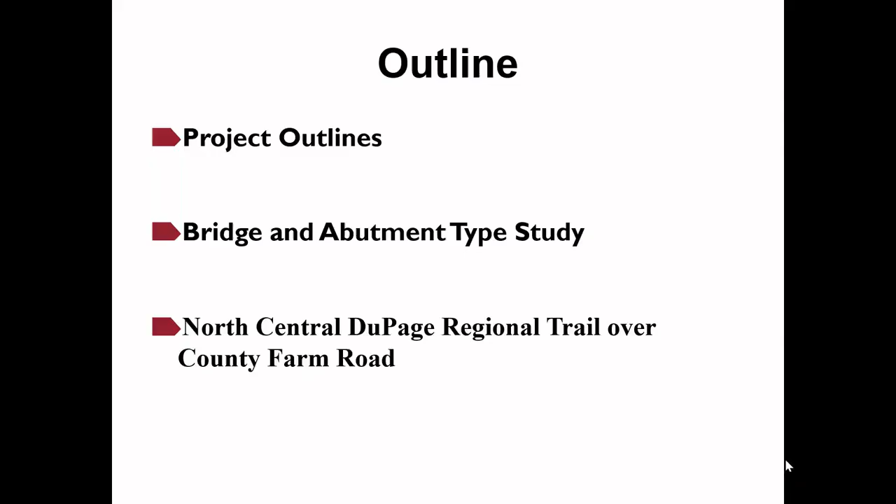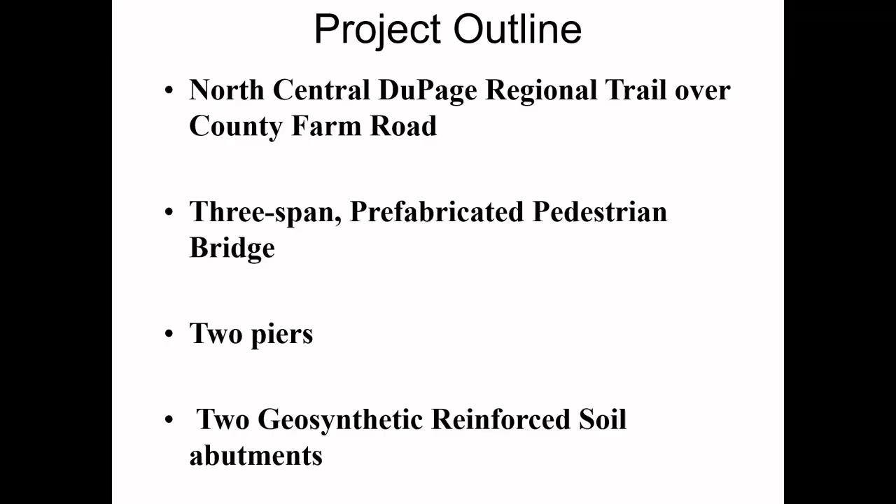Here's the project outline: the North Central DuPage Regional Trail over County Farm Road. It's a 3-span prefabricated pedestrian bridge, with 2 piers and 2 geosynthetic reinforced soil abutments.

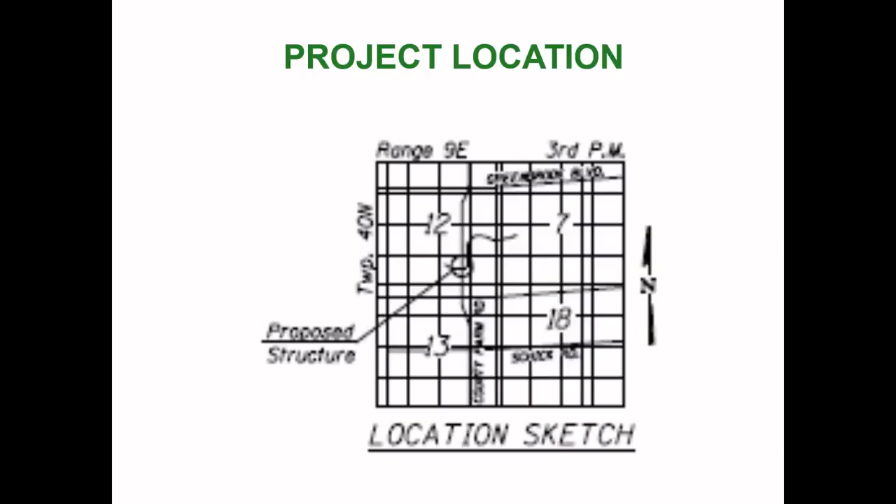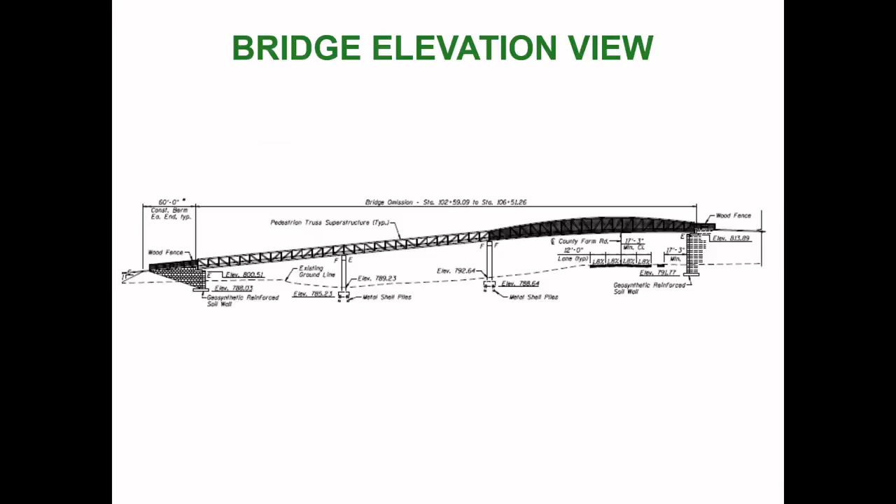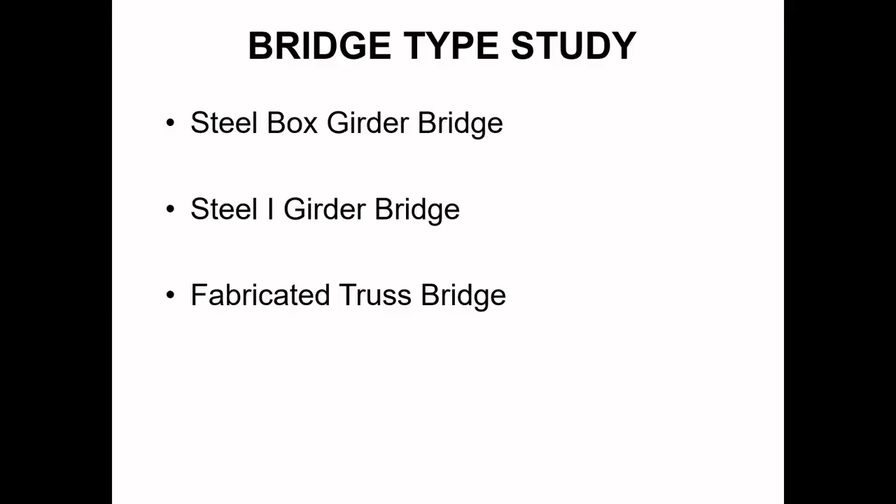During the bridge type study, we investigated 3 options. The first is a steel box girder bridge. The second is a steel I girder bridge. The last is a fabricated truss bridge.

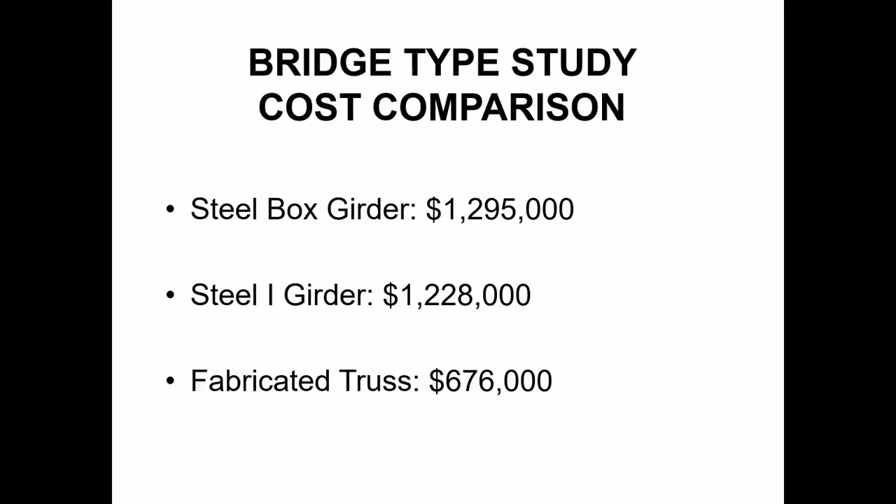Now I'm going to talk about the bridge abutment type study. We considered 4 abutment types during the study: the integral abutment with a wraparound MSE wall, the full height cast-in-place concrete abutment, the abutment with slope wall, and the geosynthetic reinforced soil abutment.

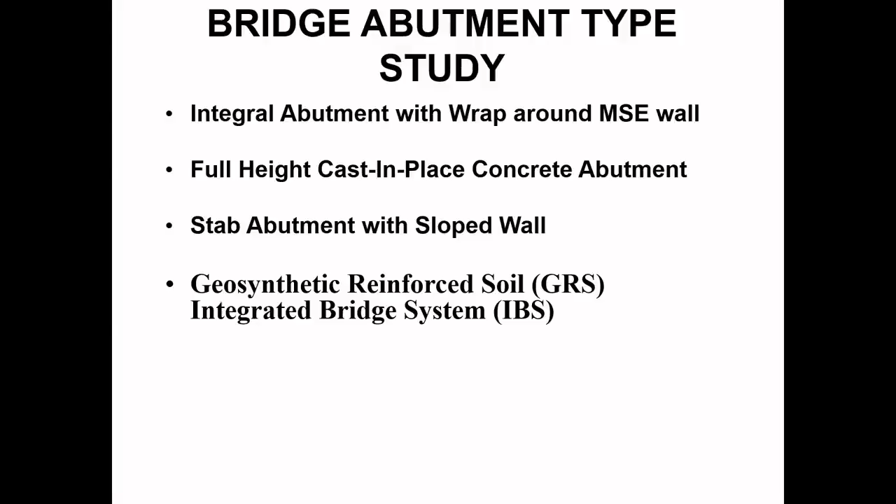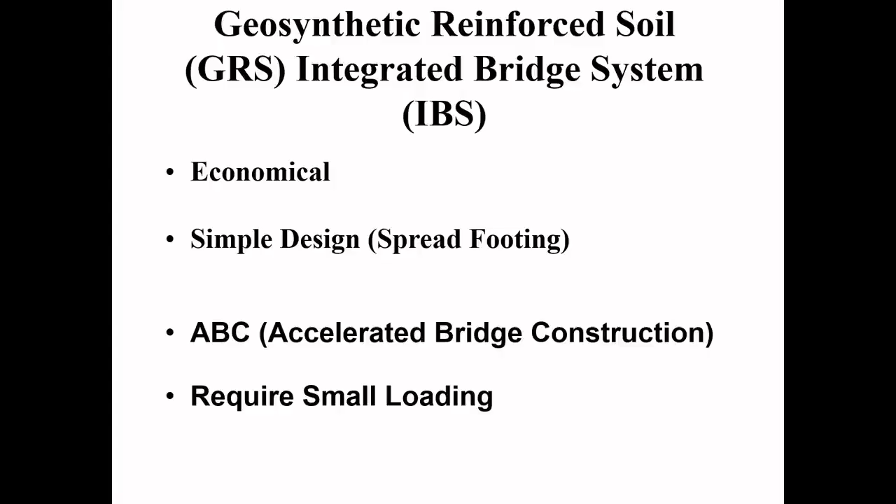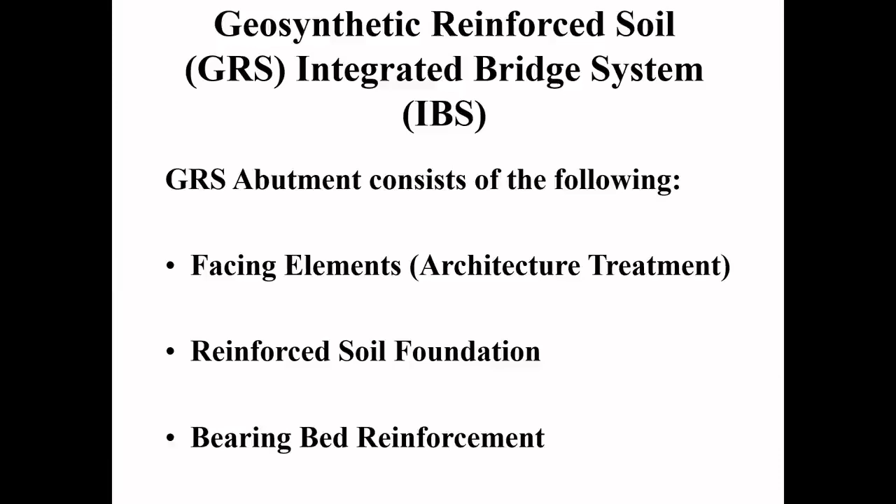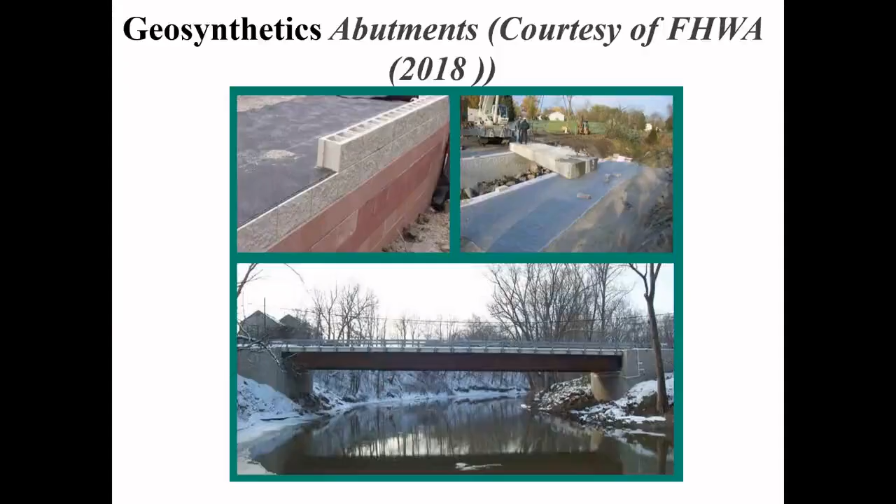The geosynthetic abutment consists of the following elements: the facing elements, the reinforced soil foundation, and the bearing bed reinforcement. Here are some pictures of geosynthetic abutments based on FHWA guidance. You can see the elevation view of the abutments, and here's the cross section showing the facing elements, the bearing bed reinforcement, and the reinforced soil foundation.

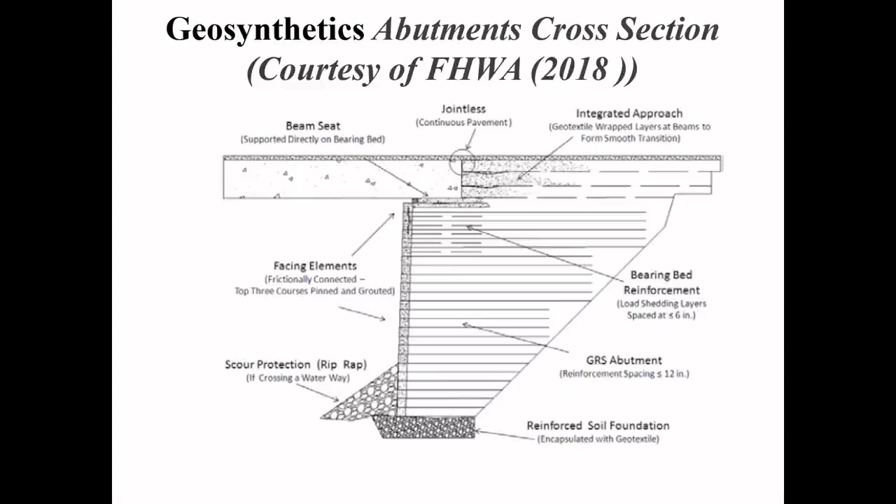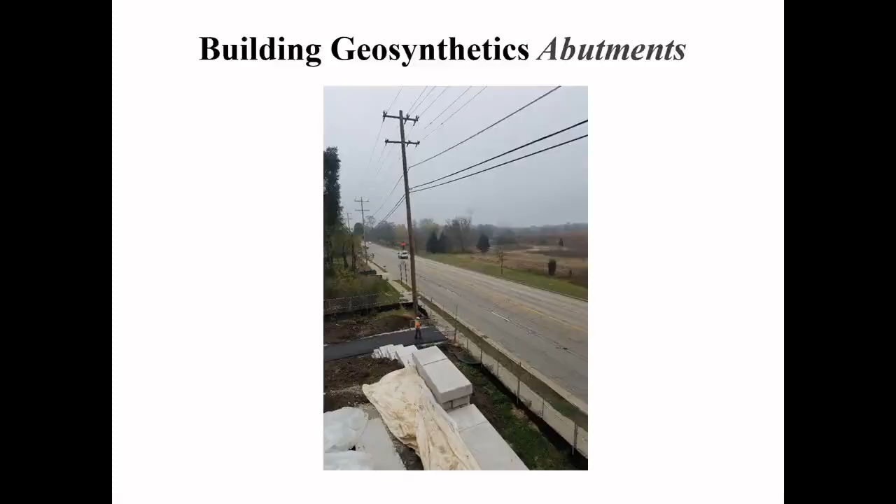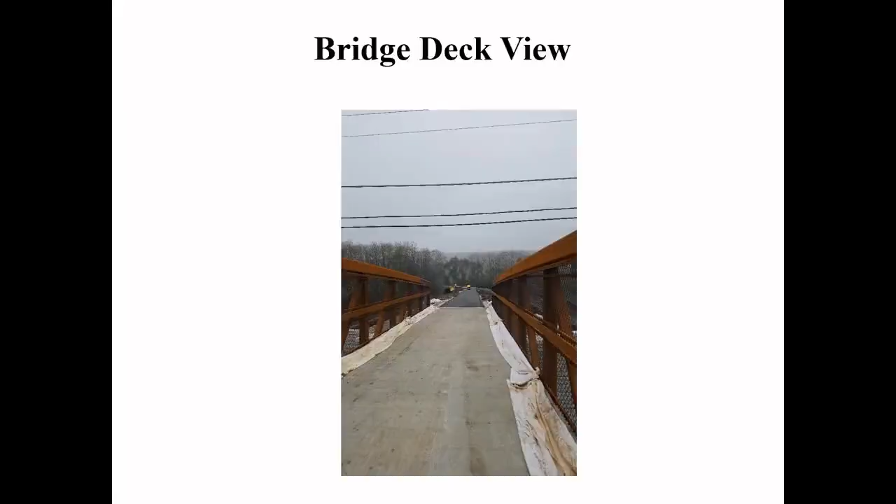Any questions? Thank you, that's the end of my presentation.

In this presentation, we are looking at a recent study we carried out on two large-scale GRS bridge abutment models. The main objective was to examine to what extent using large solid concrete blocks available from local suppliers could improve the load-bearing performance of these abutment systems, relative to a control model using the more common and much smaller CMU blocks.

This study was part of Dr. Ridwan Dagher's PhD research program, and it was carried out with the help and participation of several other research assistants at the University of Oklahoma, who are listed later in this presentation.

We know that in contrast to MSE walls, GRS bridge abutments are considered composite reinforced soil structures due to the confinement effect that tightly spaced reinforcement layers provide within the structure. Therefore, the structural contribution of the facing is conservatively ignored in the design of these systems.

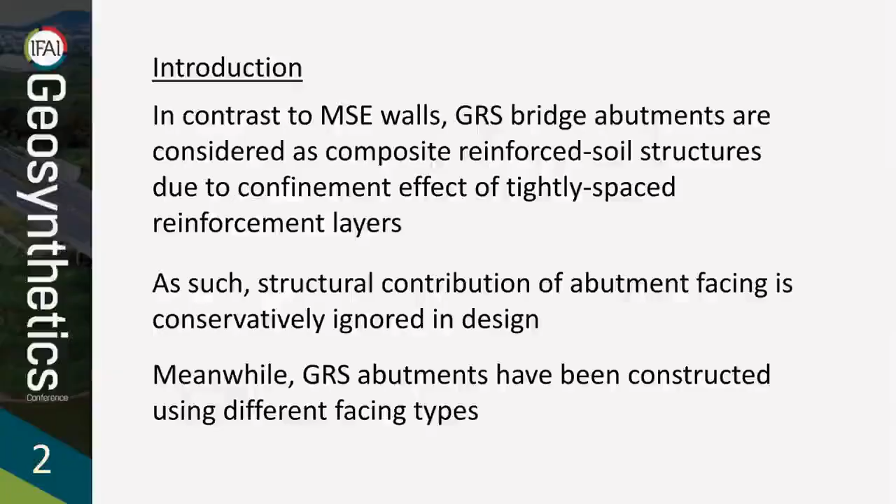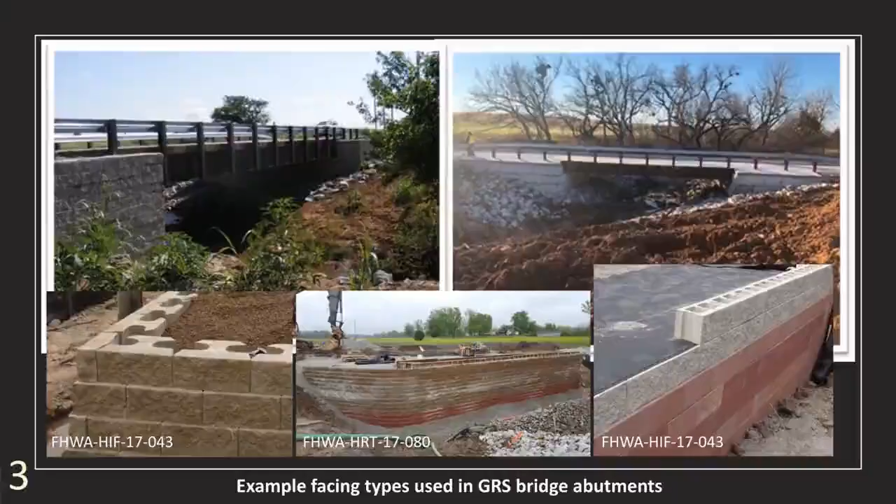Here we see example facing types that have been used in GRS bridge abutments. The one on the top right is the first GRS abutment bridge in Oklahoma, built using large solid concrete blocks.

So in this study, we wanted to examine and quantify possible structural contributions of larger facing blocks in the load-bearing performance of GRS abutments. The idea was to see if we could obtain reliable and convincing improvement in their load-bearing performance relative to those in the current FHWA guidelines.

In the long term, additional results similar to those presented here could help us possibly increase the allowable service loads and perhaps reinforcement spacing to some extent, for instance up to 18 inches, in abutments built with large concrete block facing, to help build them faster and more cost-effectively.

Apart from a direct structural contribution, there are other important advantages in using large concrete blocks for the GRS abutment facing. Number one, they can provide a firm formwork during construction of the GRS fill, allowing for a much better compaction process and increased fill density in the area immediately behind the facing.

Better compaction in this very important zone within the GRS fill is itself expected to improve the load-bearing performance of the abutment. Number two, not having to readjust small blocks during compaction, and the fact that far fewer blocks are needed overall to build the entire facing.

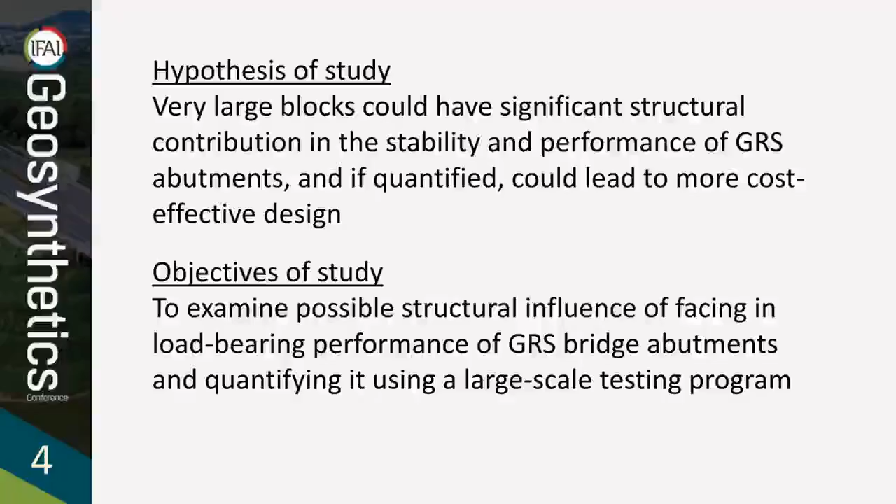Using commonly available construction equipment, these larger blocks can potentially help build these abutments faster than the more common CMU facing. This should further the core purpose of this technology as part of the ABC and EDC initiatives, which has been to build faster and less expensively since their inception.

Here are side-by-side elevation views of the two abutment models we constructed and tested in our lab. They were nearly 100 inches, or about 2.5 meters, tall.

The facing of the control model on the left was built with standard 200 by 200 by 400 millimeter core concrete masonry units, i.e. CMU, whereas the one on the right included significantly larger solid concrete blocks from a local supplier. The dimensions of the full-size blocks in that model were 0.6 by 0.6 by 1.2 meters.

Half blocks were used in the side sections.

The photographs shown here were taken after the models had been fully constructed and the loading assembly was set up for the loading stage of the experiments.

The blue load cells at the top have 400 kips of load-measuring capacity each, placed on top of a steel loading beam sitting directly on top of the GRS fill. We can also see wireline extensometers used to measure facing deformations and settlements of the loading beam.

Even though GRS abutments are invariably three-dimensional structures, we took provisions to reduce sidewall effects and directed our focus to comparing the performance of the two models within their 4-foot wide middle section in our tests.

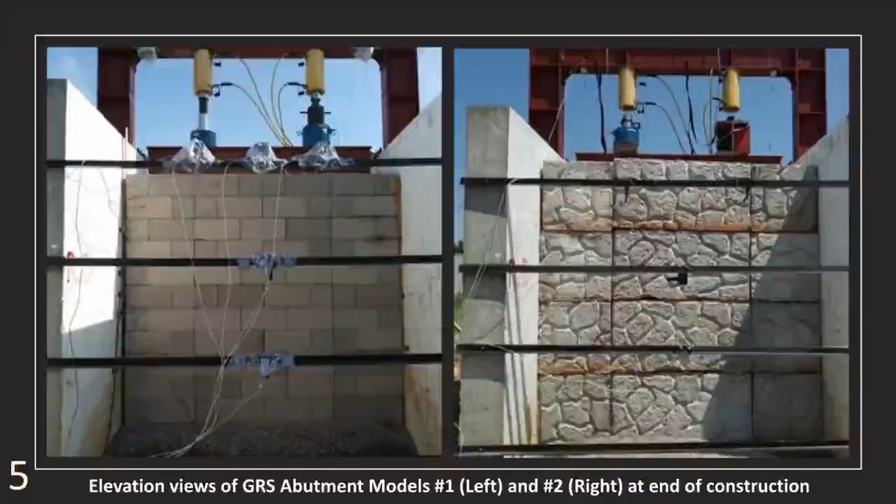Additionally, the instrumentation for the most part was concentrated in this middle section, and all reinforcement layers over the height of the models were placed separately in the three full-height sections we see in these abutment models, i.e. the 4-foot wide section in the middle, flanked by two 2-foot wide sections on both sides.

Here, the diagram on the left shows locations of drilled holes in the back wall of the test box that were used to run the wireline extensometers through.

And on the right, we see wireline extensometers that were mounted on the back of the test box and were covered with a tarp.

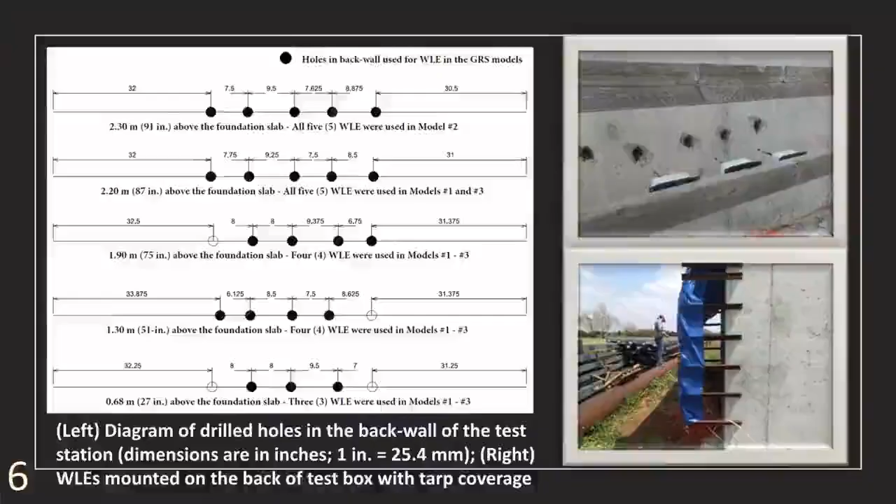Here are drawings showing the wireline extensometer layout in each model. The small circles represent the contact points of the wireline extensometers with the reinforcement layers.

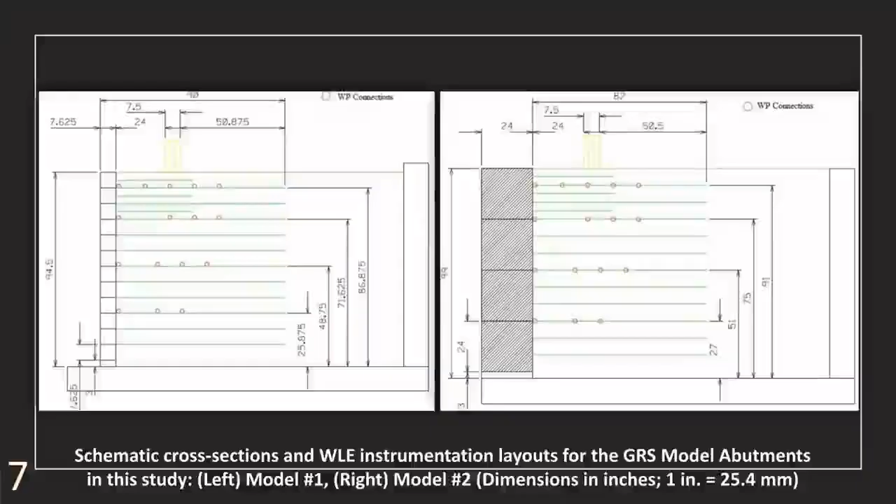An open graded aggregate called 3/8 of an inch cover number 2 was used that we obtained from a local supplier. Its gradation was comparable to, and in fact somewhat more open than the AASHTO number 89 aggregate, which is recommended and used in these abutment systems.

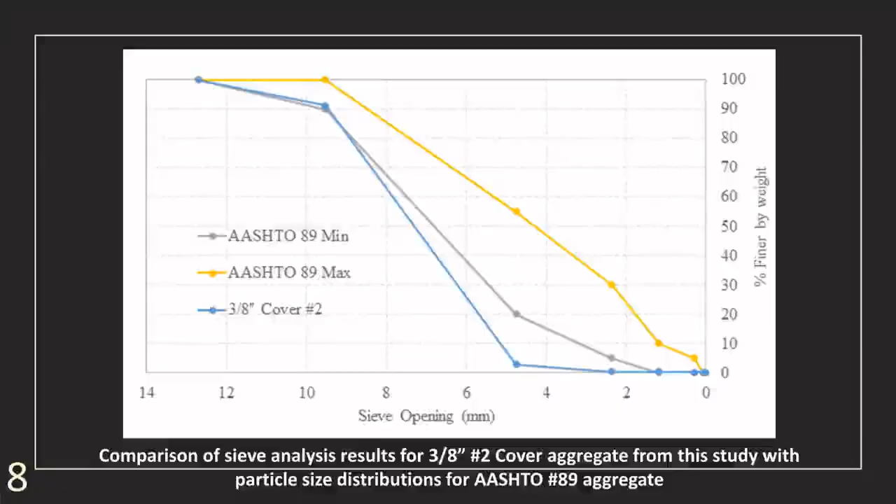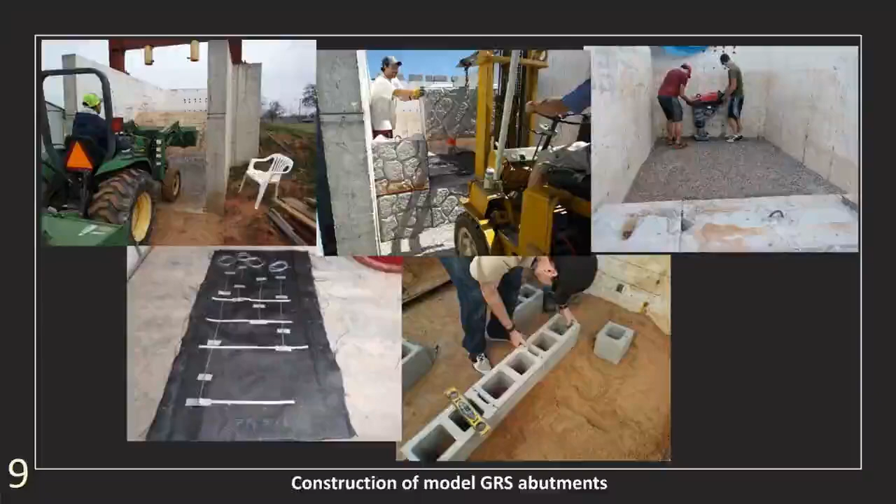Here are some snapshots of the construction procedure, including reinforcement instrumentation, placing and compacting of the fill, and the facing blocks. Here we see top views of model number 1 toward the end of construction. On the left, we see shorter reinforcement at 4-inch vertical spacing to make a bearing bed in the top section of the abutment under the loading beam.

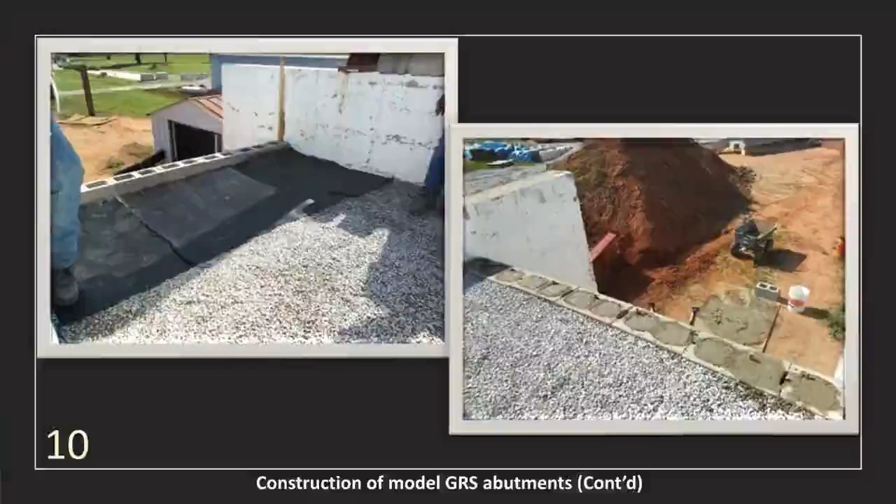And on the right, rebars and infilling of the top 3 courses of CMU blocks for added stability in that section of the facing as recommended in the FHWA guidelines. The load was applied in steps of 10 to 15 kips at a time, followed by a waiting period to make sure that the short-term deformations were stabilized.

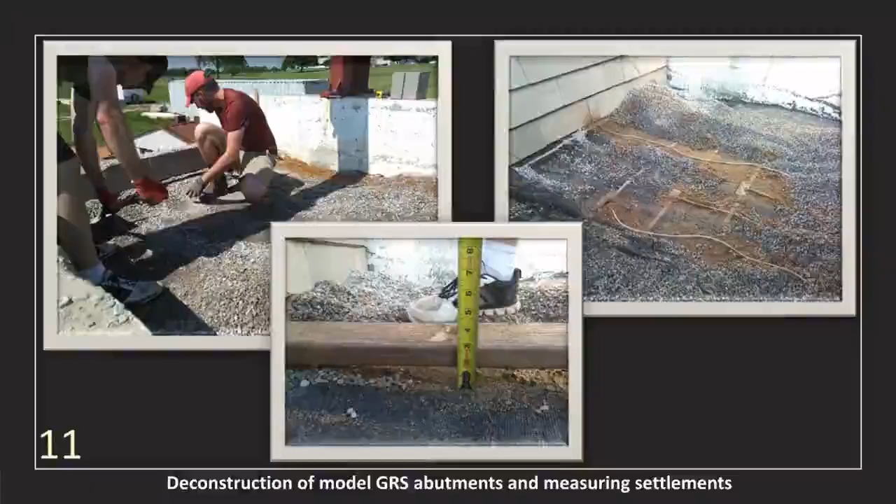We then proceeded to increase the load again in a similar pattern until we saw significant settlement under the loading beam. Afterwards, the load was also removed in steps until the models were unloaded completely. After that, the loading assembly was dismantled carefully, and we proceeded with the deconstruction of the models in layers, during which we measured GRS fill settlements at reinforcement levels.

Now, as for some results, here we see facing deformations at end of construction for each model. The contour map on the left is for the model with CMU facing, and the one on the right for the model with large concrete blocks, which shows significantly less deformation at end of construction, i.e. a maximum of 0.6 inches versus 2 inches in the case of CMU model.

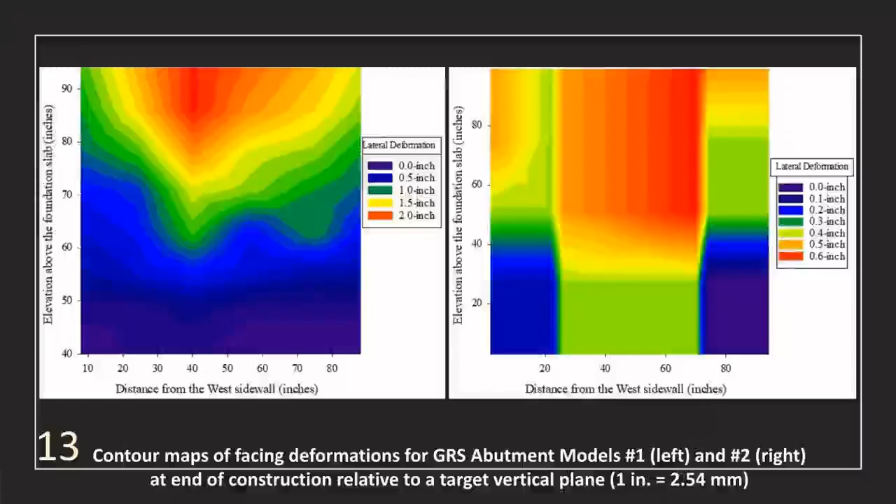Movements measured by the wireline extensometers that were attached to the tail end half of the reinforcement are attributed to the overall settlement of the fill and correspondingly the reinforcement layer at this location. But those wirelines number 1 and 2 that are significantly larger are attributed to both the settlement and outward movement of the GRS fill immediately behind the facing.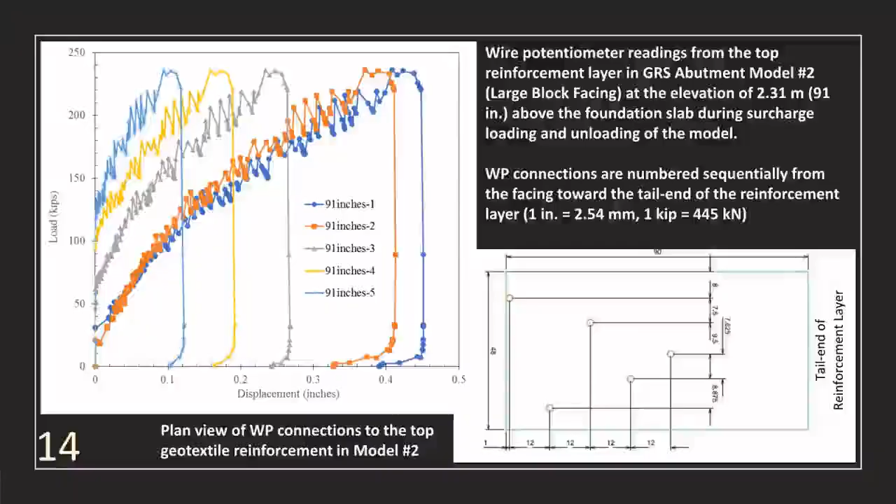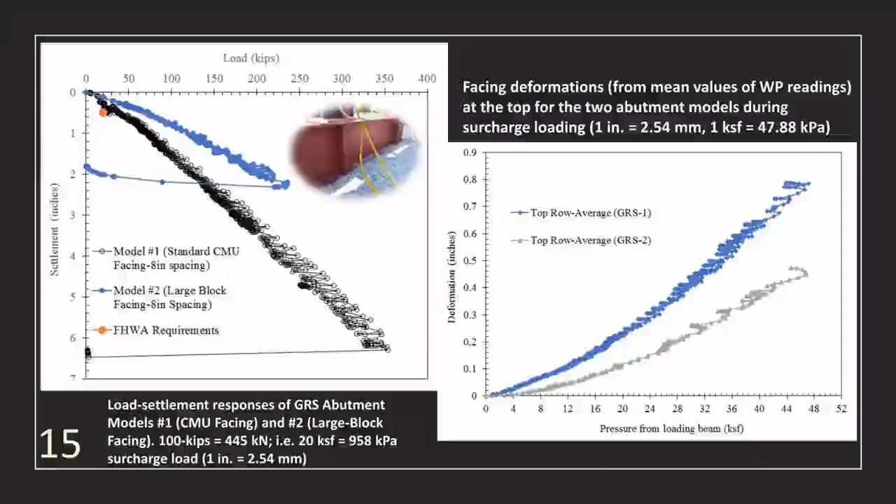The graph on the right shows a comparison of facing deformations in the 2 models as a function of the applied load. And again, we see that both models deform much less than the allowable limit of 1% height, which is roughly equal to 1 inch, even at much higher loading magnitudes than the design load of 4 KSF. Nevertheless, again, model number 2 showed significantly less facing deformation throughout the test.

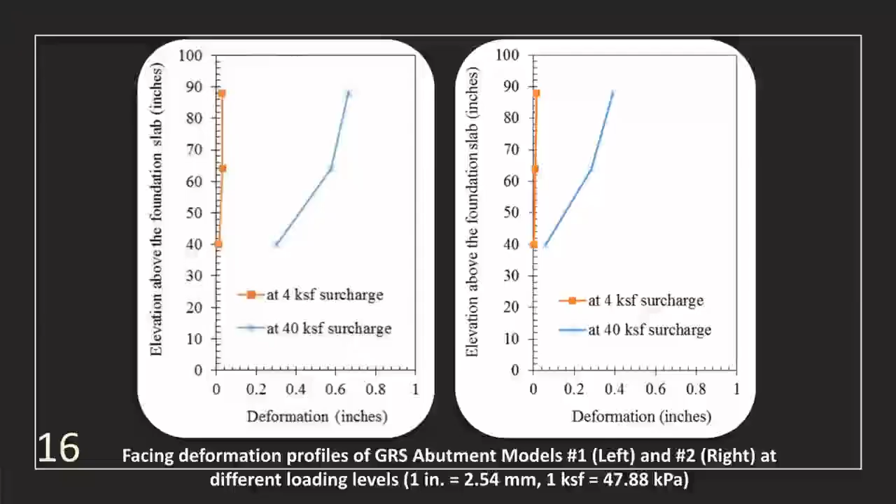This slide shows another perspective on the facing deformations that we measured for those two models. Results are shown for the FHWA design load of 4 KSF and a much larger, i.e. by 1 order of magnitude, load of 40 KSF for comparison purposes. Again, the allowable limit for lateral deformation is 1% H, which is about 1 inch, which would be the right-hand side boundary of each graph.

And here are some main conclusions. 2 large-scale instrumented model GRS bridge abutments were built and load tested to observe and measure differences in their load-bearing performances. Models were nearly 100 inches or 2.5 meters tall. The models were comparable to each other except for the facing blocks used. The size and type of concrete blocks used were significantly different.

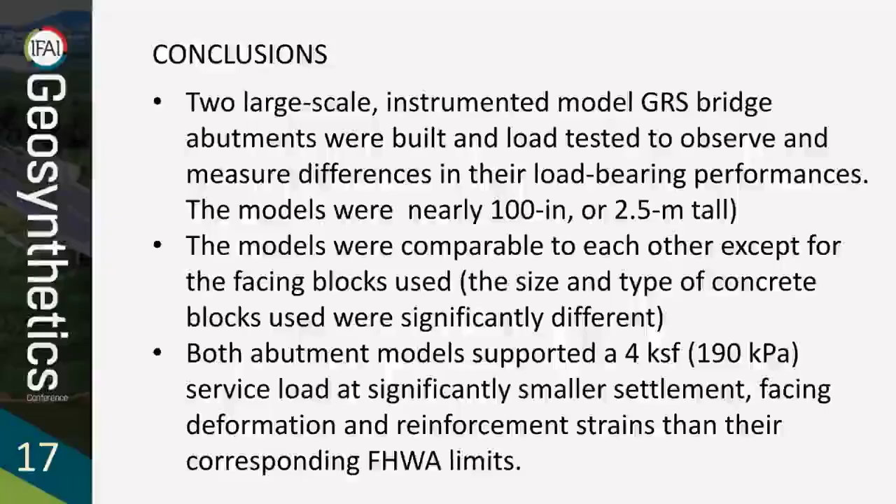Both abutment models supported a 4 KSF, equivalent to 190 kPa, service load at significantly smaller settlement, facing deformation, and reinforcement strains than their corresponding FHWA limits. Model number 2, with much larger solid facing blocks, showed superior performance to the model with the more common CMU facing alternative. It showed small deformations at any load level. While not included in this paper, large block construction alternative was also found to be faster and allowed for better compaction of the fill behind the facing.

So overall, results presented in this paper and findings in an ongoing follow-up study suggest that large block GRS abutments could lead to improvements in the load-bearing capacity and performance of GRS abutments, with a potential for a more widespread use in local and county roadway projects.

Hello, I'm Jennifer Nix with the Federal Highway Administration. We've been performing a lot of instrumentation and monitoring projects on geosynthetic reinforced soil integrated bridge systems around the country. This paper focuses on a GRS IBS in Sheffield, Massachusetts. It's a 105-foot long span at 30 degrees skew on 2 GRS abutments with the GRS integrated approach.

We wanted to look at the thermal interaction between the superstructure and substructure of this type of bridge system as compared to conventional integral abutment bridges. My co-authors on this paper are Michael Adams with the Federal Highway Administration and Mohammed Khan with HP Tech.

Hello, my name is Michael Adams, one of the co-authors of this paper. We've elected not to present each individual slide, but to simply provide an overview of the outline. First, the GRS IBS. Most of us know what that is. The fundamentals of superstructure-substructure interaction due to thermal effect on small bridges. The general difference between an integral and semi-integral abutment. An overview of the Sheffield Bridge specific to its geometry, materials, and sequence of construction.

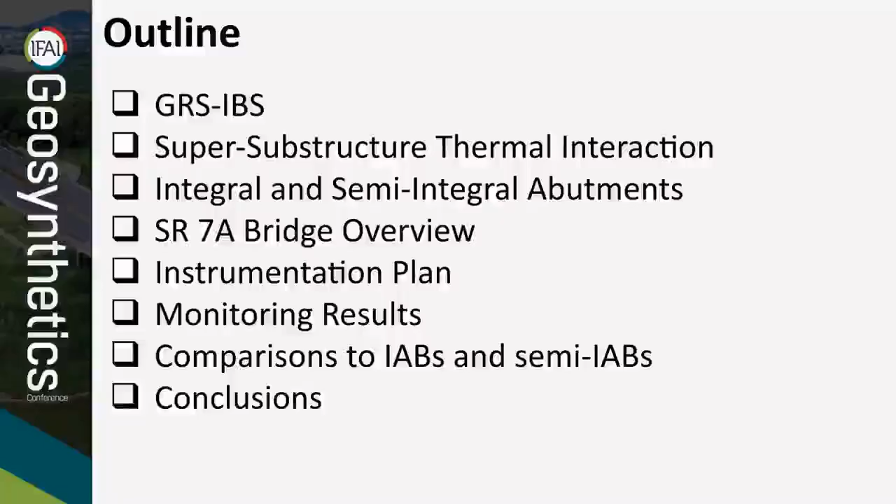The instrumentation plan specific to this paper are the contact pressure cells, the in-place inclinometers, and a reference pressure cell installed outside to monitor the ambient temperature. Results of this 2-year monitoring period are also discussed in the paper to show variations in seasonal and daily displacements and corresponding lateral earth pressures. The general comparison between this bridge and the measured movement of an integral abutment bridge, followed by general conclusions.